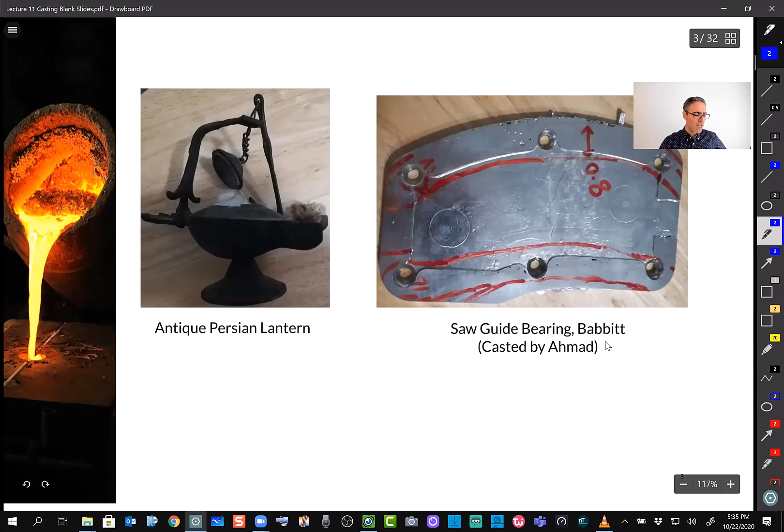But the situation was miserable when I cast this one. A lot of smoke came out during melting. It was an alloy of babbitt, or an alloy of tin and copper, which I'll talk about. The part I got at the end had nothing to do with what I had planned. There was some machining on it, this hole, but there was shrinking—the geometry shrank, and there was cracking in it. It wasn't a good experience. What you're learning today is just the very basics, but there's way more to it. Next Thursday, an expert in casting will come talk to you about the challenges around it.

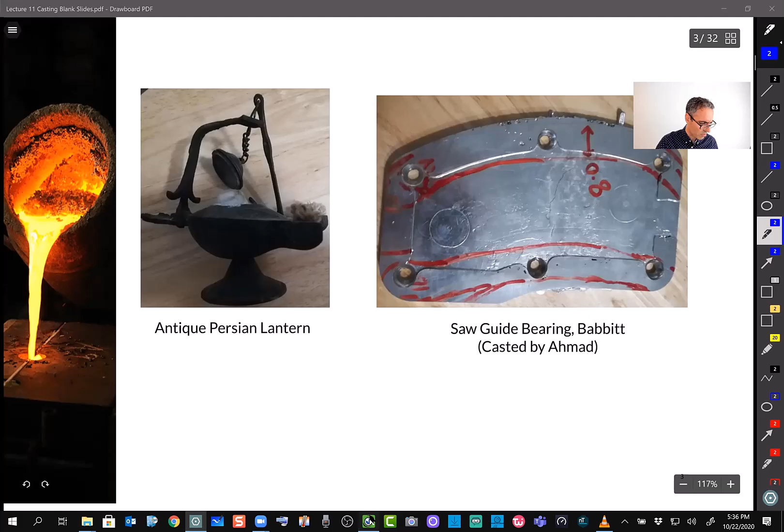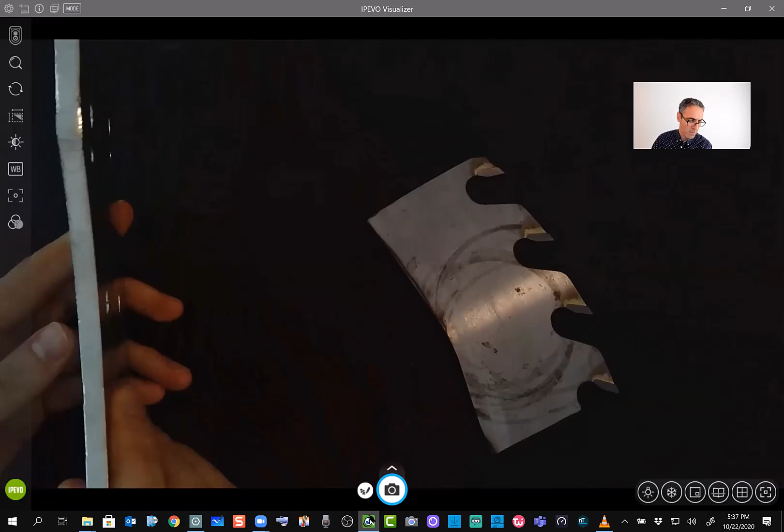So the second one—I believe I have one babbitt here to show you. This is not the one that I made, this is another one. For some reason the video becomes slow. This is basically a guide pad babbitt, made by casting.

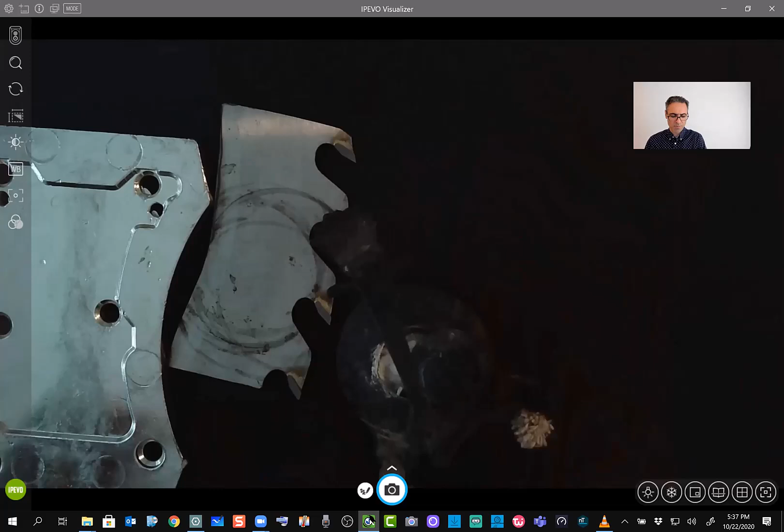The babbitt is basically a soft material. When it's in touch with steel, like this portion of a saw, it creates the bearing that we want. It has an oily surface, and being soft, it creates a nice bearing for what we want. The second image I showed had a black background and couldn't be seen well. Let me put a white background instead, maybe a bit more color—yeah, that's better now.

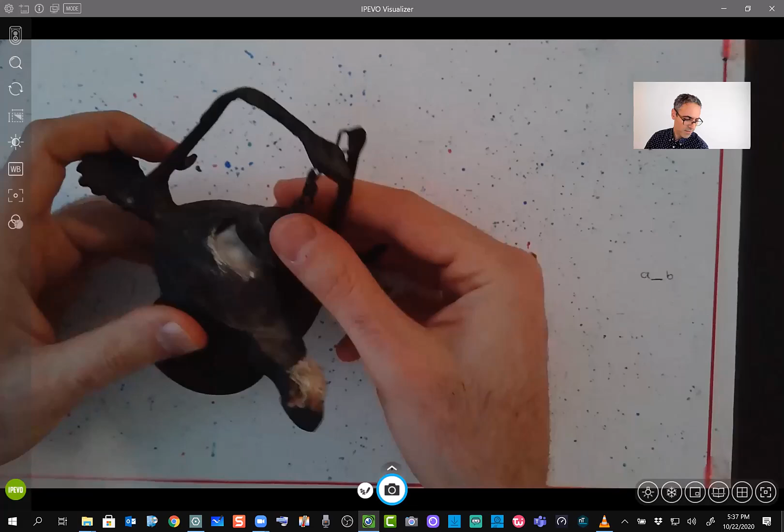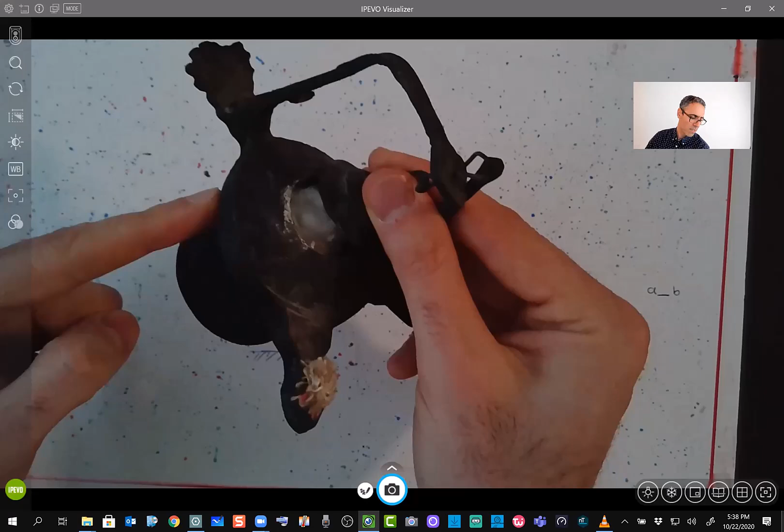It's an antique lantern, old generation. I brought it with me. It's iron, cast a long time ago. I don't know exactly when, but probably more than 200 years ago at least. So anyway, many old things were made by casting.

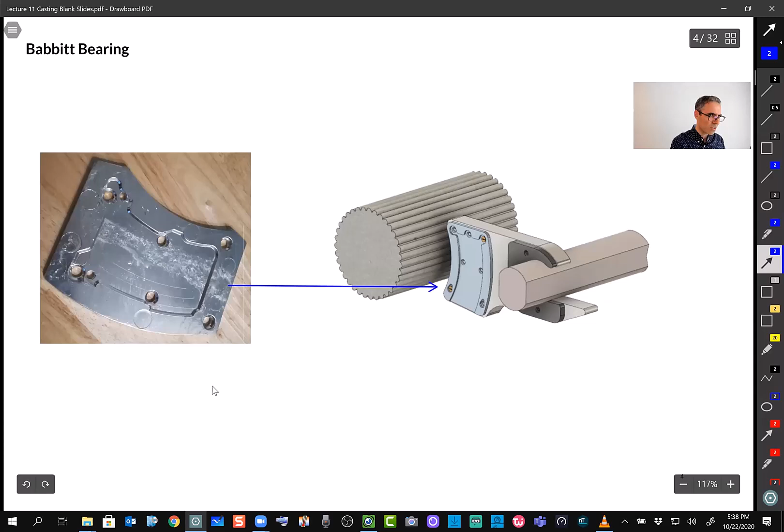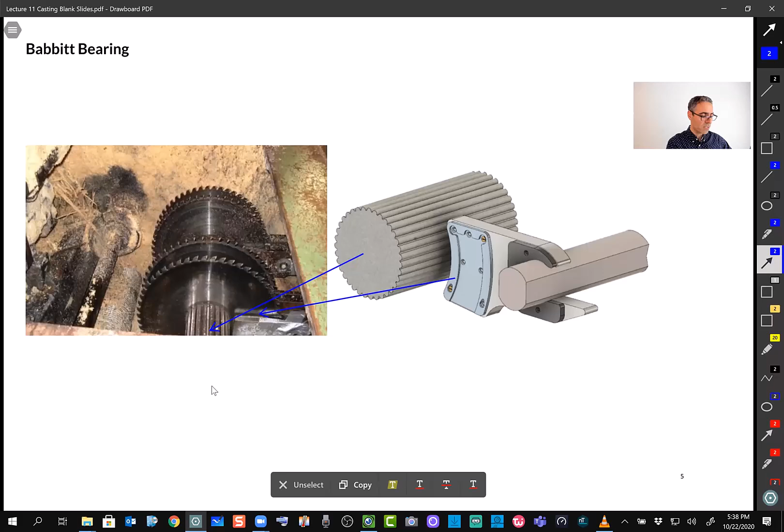Let's move back to the slide that I had. So the guide babbitt I told you about—let's say you have a saw guide, something like that. I want to give you an idea how this guide pad works as one application. The babbitt is located here on this schematic, and on this image, this is where the babbitt goes basically. This is the arbor, and these are the saws where they sit. On each side of a saw, there's a pair of these guides, which create the bearing for this system.

Yeah, we put the saw on there, and the second one shows clearly the two sides, basically the guides, and the guide pads are inside these guide arms. And obviously this is where the cutting happens. The saw rotates with high speed, and these guide pads provide the bearing that we want. All right, so that's the guide pad.

The reason I mentioned this is that the main manufacturing method for guide pads is casting. Sawmill is a large industry, and in an average sawmill they cast maybe 100 of these guide pads per day, because they wear out very fast, and every 4 hours they need to change it. Without casting, any other manufacturing process would be super expensive.

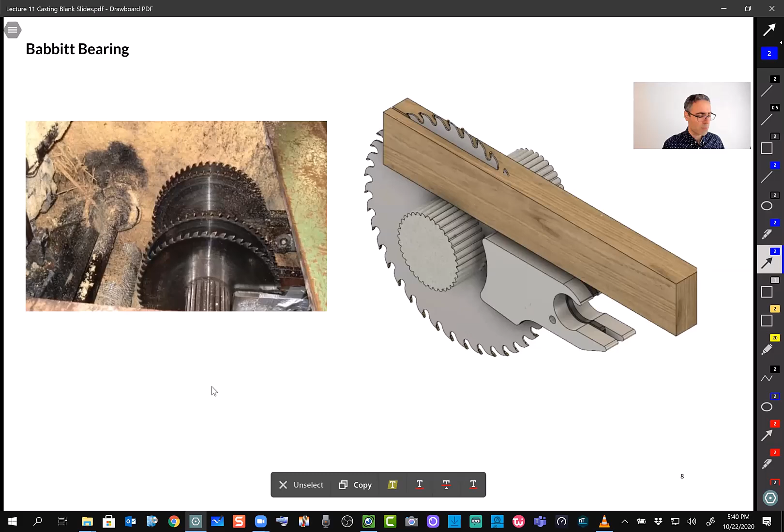So let's move to the second example. That one is basically an espresso filter holder. And this is the question that I have. In a moment, I will show you the actual espresso filter. It is from my coffee machine.

The good thing about teaching from home is I can find things at home to show you without needing to carry stuff around.

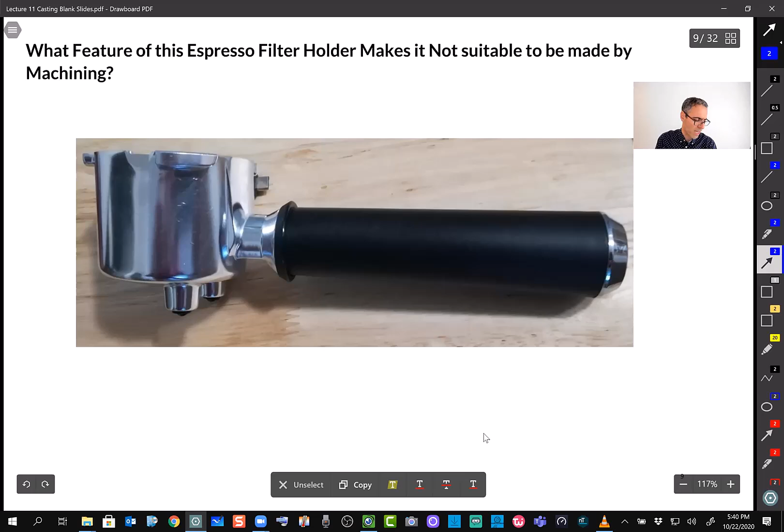So this espresso machine, let's say this is the question we want to answer: why is it metal, an aluminum alloy? Why is machining not suitable for that? Let me show you the actual part.

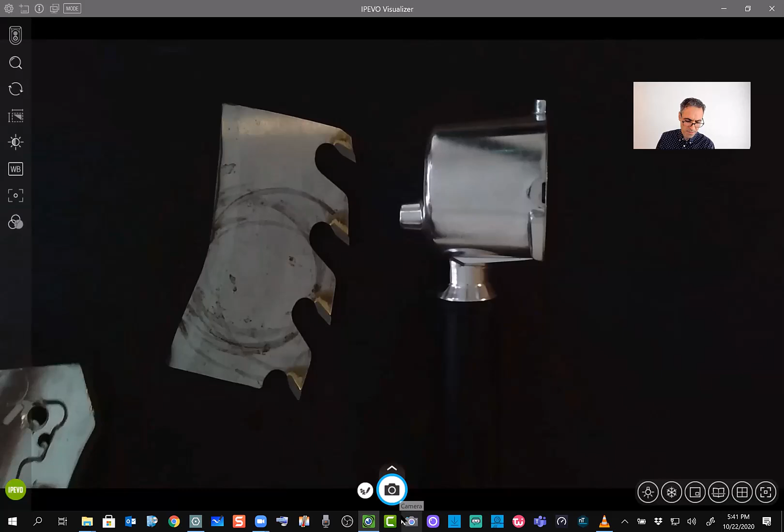So that's the coffee espresso filter. Let me get rid of these. Okay, so maybe also black background is not a good idea.

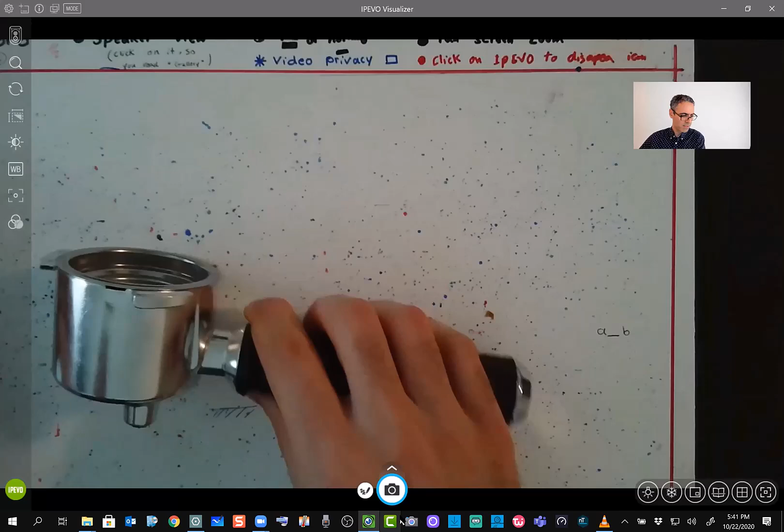This online teaching, I guess, I'm not sure, makes a student's life easier, but it made most of the teachers' life more difficult. In the past, it was easier for me to go to class and show this stuff, but now I have to come up with some way to show it to you.

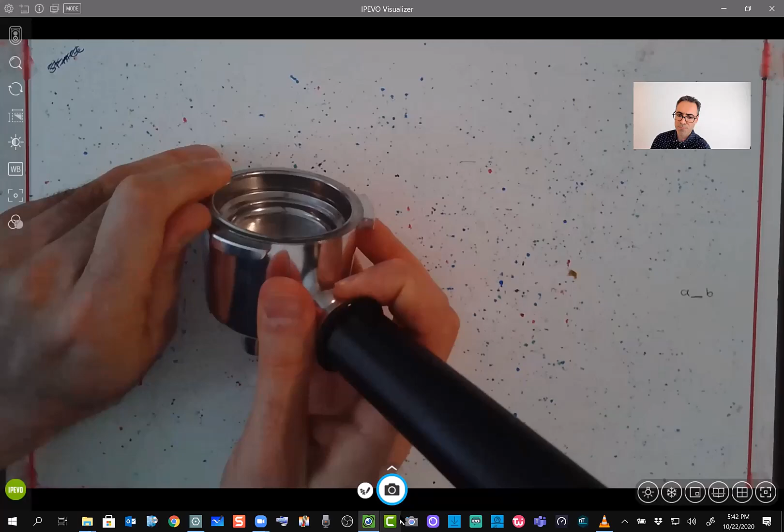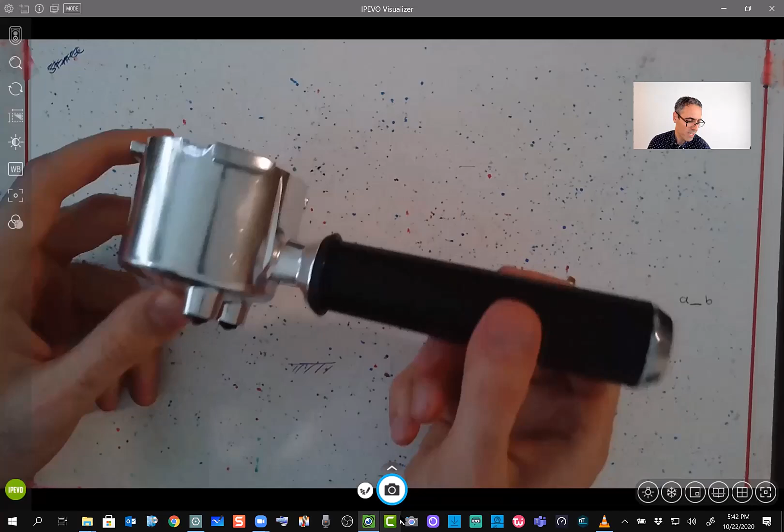All right guys, this is a question for you, think carefully. Let's say you are in an interview and somebody shows you this part and says, well, this is a filter holder for an espresso machine. Of course I can remove this filter, and later I have to make sure I wash it before I make my coffee. So it is hollow with some plastic inside, but the focus is not around the handle, which is of course thermoset. The focus here is on this metal part.

So the question for you is, why do you think we cannot make this by machining? Any idea welcome. Let's imagine you are in an interview and you have to come up with something, because in an interview you cannot just say nothing. Why do you think? Go ahead, Jesse.

Manufacturing costs, just because this probably has to be mass produced, so it would cost a lot to have a bunch of machinists make this. That's a valid point. So as Jesse said, if you're making thousands of these, then machining of course is not suitable.

What else? Probably it's got... oh sorry, go ahead. I was just going to say it's probably due to the complex shape of it. Like the milling machine probably can't get to all parts of it.

Yep, that's also true, as Ahmad pointed out. Look at these features, like here is hollow, here like that — really, how do you want to machine it? If let's say you put it like that and you machine it, it's not possible to get underneath it. You have to machine it one way, let's say with a complex milling machine to create this contour for us, and then you have to flip it. It's going to be a headache, and almost maybe one filter is going to cost thousands of dollars.

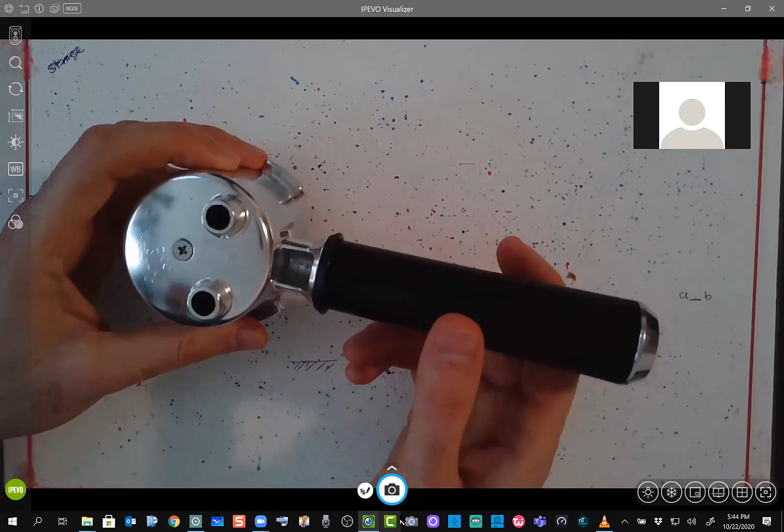It's a complex shape that's hard to mill from one side. As our friend mentioned, it's the complexity of the shape. And also, mass production doesn't make sense with machining, because if you want to machine these things, it's going to be a headache. It's not symmetric, so I can't put it on a lathe - I have to do it by milling, like the pocket milling you learned, but this time a positive shape. It's going to be very expensive and basically crazy to do it by machining.

So, but why casting? Okay, casting is a process which can be used for mass production. The quality is relatively good, and it's relatively cheap. We'll discuss it a little bit more and I'll elaborate more on that.

It can go from different sizes, like this jewelry on the left. And this is me - I'm a tall guy, relatively tall, 185, not bad. This is in Granville Island, probably if you might have passed this one - a ship propeller made by casting.

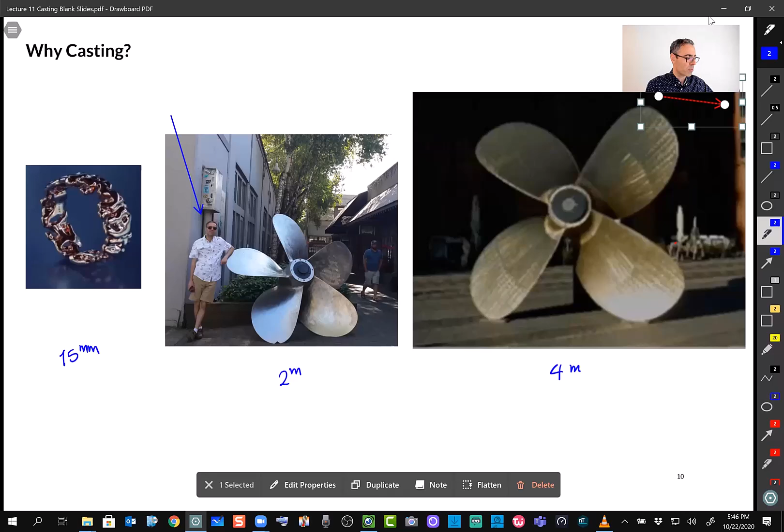Historically it's important. The main reason the Wright brothers were successful was the fact that they used aluminum for their engine block, and they used die casting. So one positive note for die casting. And I guess you guys know the Wright brothers.

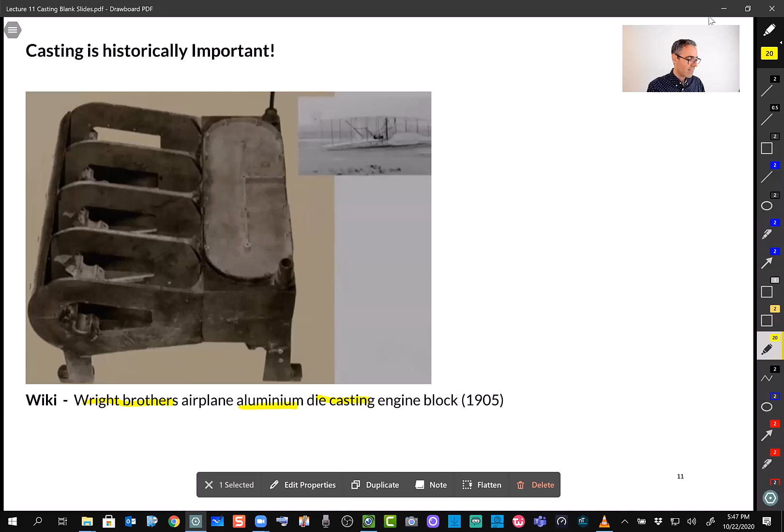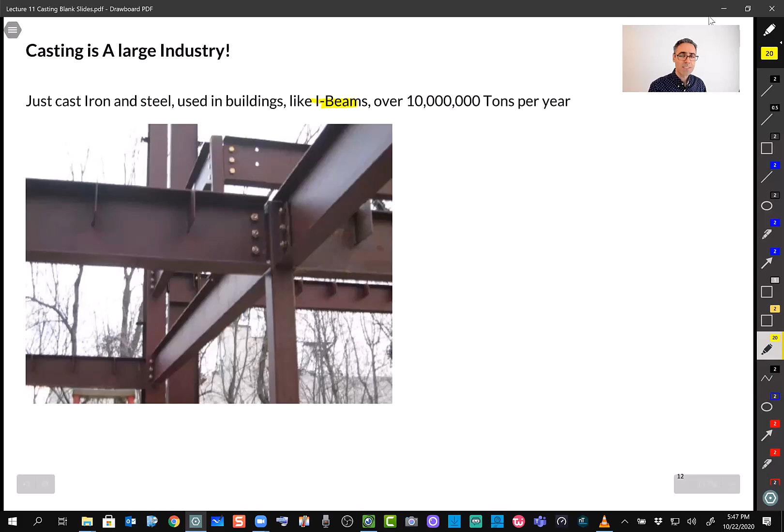Money-wise, that's important. Only I-beams - just the I-beams - on average 10 million tons of casting for I-beams. So it means it's a gigantic industry. It's really an old age manufacturing process, 6,000 years ago, that's a long time ago, right? And who knows, maybe there are even older ones than that as well.

Like this, on the left, this bronze statue of somebody - I forgot, to be honest, but maybe later on Wikipedia I can find more details - 4000 BC. Then you come to these, every day, probably if you're walking on campus, or everywhere in streets, you see these red or yellow fire hydrants and pipes. And then it comes to these complex valves, nuclear parts, or these blades, or this V-shape engine block, modern V-shape engine blocks, and these turbine blades - they are all made by casting. So you see, from 6,000 years ago, still a hot topic and a hot manufacturing process.

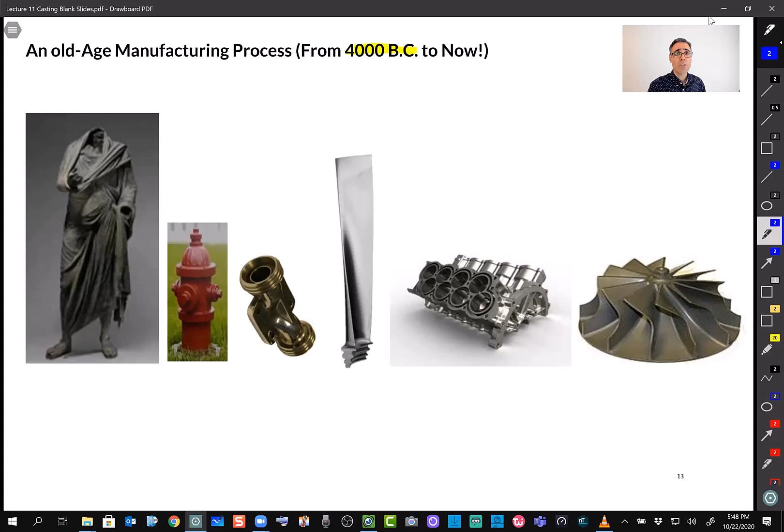It was more like history, but I can see the time is up now. So yeah, let's just finish this slide and then we'll continue next week. I'll elaborate more on this next week.

Casting - there are many ways to do casting, but these are the most common, the three most common methods: sand casting, die casting, and investment casting. Investment casting is another name for lost wax casting - sounds like a weird or fancy name, lost wax, but that's another name that people call it.

In general, sand casting - if you want to make bigger, large parts, rough surface, so you don't care about the quality of the surface or too much about precision, you go with sand casting. Die casting - if you want a little bit more accuracy and surface quality is important for you; many parts in a car are made by die casting. And investment casting - if you have a complex part with complicated internal curvature, that's the method. We're going to talk about these next week with some engineering analysis around each of them.